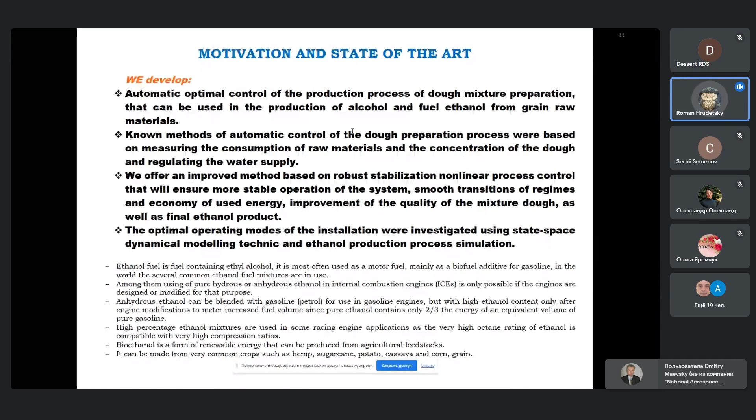The optimal operation modes of the installation were investigated using state space dynamical modeling technique and ethanol production process simulation.

From 2007 to 2008, the share of ethanol in global gasoline type fuel use increased from 3.7 to 5.4%. In Ukraine today, in the conditions of military aggression and war against Ukraine, and in view of issues of energy security and stable function of the fuel market, these initiatives are gaining special relevance.

Therefore, fuel ethanol is considered one of the most important renewable fuels due to the economic and environmental benefits of its use. It is the most promising feedstock in producing bioethanol due to its global availability and the energy gain we can obtain from biomass, used for cogeneration of heat and power.

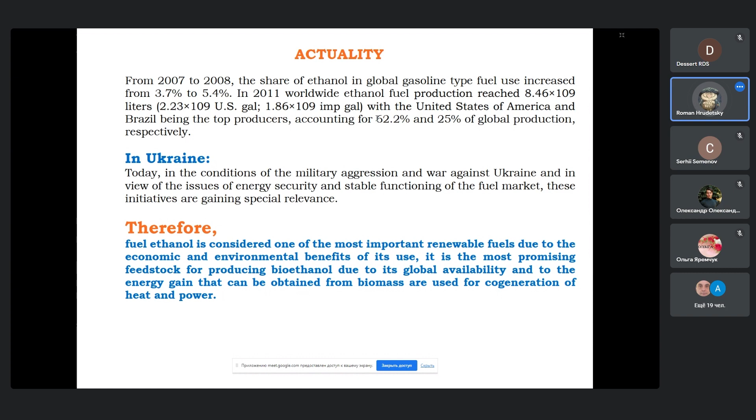We developed automatic optimal control of the production process of dough mixed preparations that can be used in production of ethanol from grain raw material.

Known methods of automatic control of dough preparation process were based on measuring consumption of raw materials and concentration of dough, and regulation of the water supply.

We offer an improved method based on robust stabilization nonlinear process control that will ensure a more stable operation of the system, smooth transition of regimes, and economy of used energy, improvement of quality of the dough, as well as the final ethanol product.

According to the proposed method, the concentration of raw material is determined and the regulation of water supply is carried out according to a non-linear law.

Several process configurations for fuel ethanol production were developed and studied using state space dynamical modeling technique and process simulation. The production device consists of a pre-boiler mixer 1,

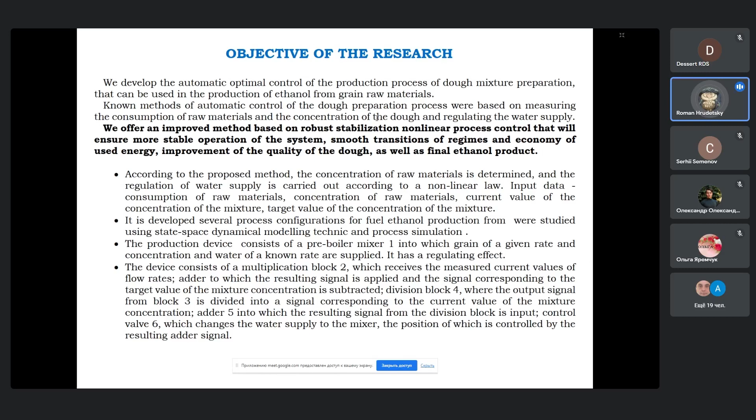into which grain of a given rate and concentration, and water of known rate, are supplied.

The device consists of multiplication block 2, which receives measured current values of flow rates, to which the resulting signal is added, and a signal corresponding to the target value of the mixture concentration is

subtracted in division block 4, where the output signal from block 3 is divided by a signal corresponding to the current value of the mixture concentration, adder 5, into which the resulting signal from the division block is input

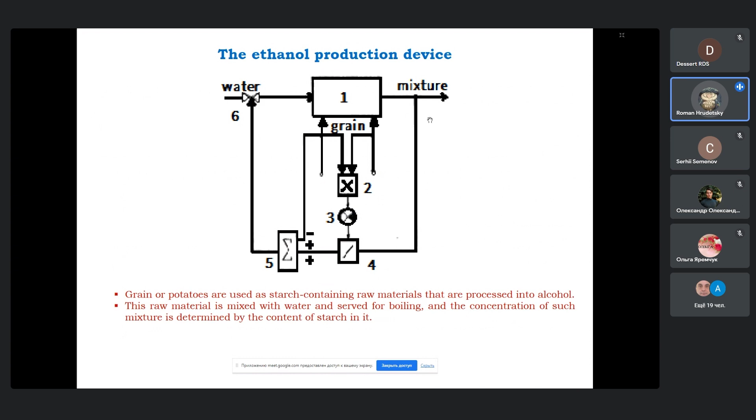to control valve 6, which changes water supply to the mixer, the position of which is controlled by the resultant adder signal.

To ensure homogeneity of the mixture, it is mixed with a propeller stirrer.

The purpose of boiling raw material is to release starch from plant cells and convert the starch into a soluble state.

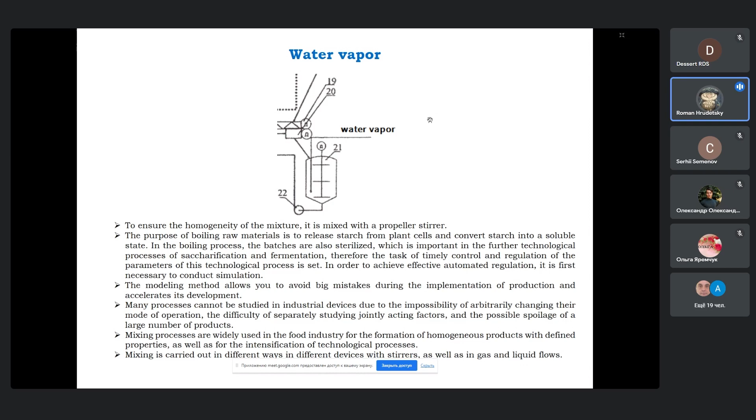The modeling method allows you to avoid big mistakes during the implementation of production and accelerate its development. Many processes cannot be tested in industrial devices due to the impossibility of arbitrarily changing their mode of operation.

Main results: we develop a robust control strategy based on the minimization of the energy efforts of the ethanol production plant, in the presence of small state perturbations of states from the position of equilibrium.

To solve this problem, we consider the state space model technique. This model includes a linearized equation and full feedback, taking into account nonlinearities.

In order to choose the correct response, a control selection center uses mechanical states to select the amount of response necessary to counter the disturbance. This center evaluates the difference between an estimated state and desired state, and chooses the appropriate

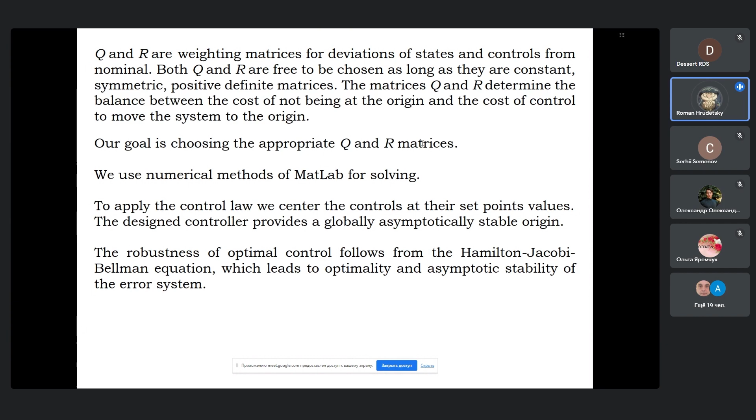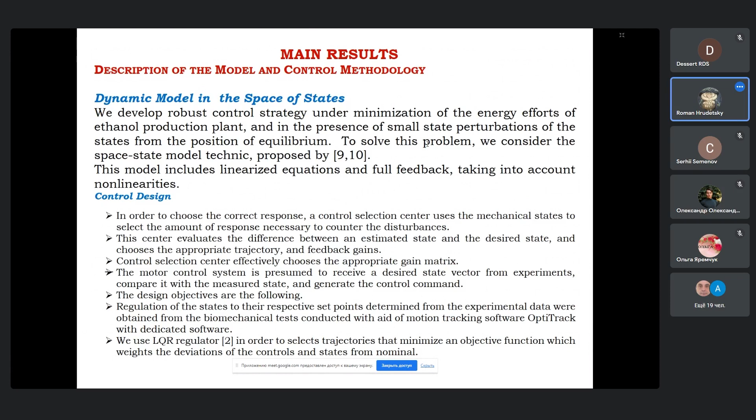Model experimental data were taken from an ethanol production installation used at most plants in Ukraine. Necessary experimental tests were conducted in real time in order to provide further analytics in MATLAB environment, and MATLAB experimental testing in order to perform an analysis and obtain real data from control law simulation as reference values.

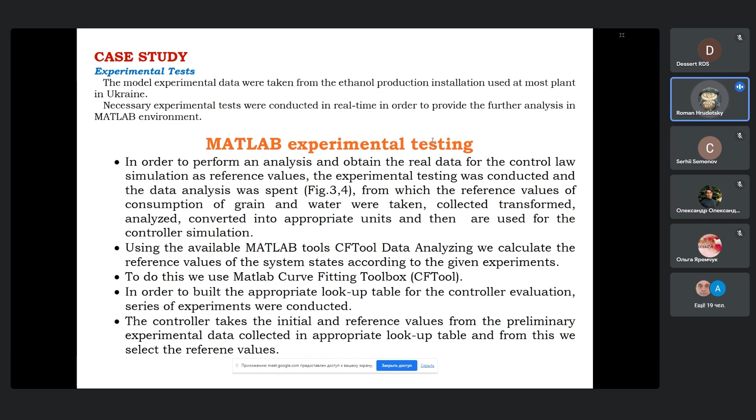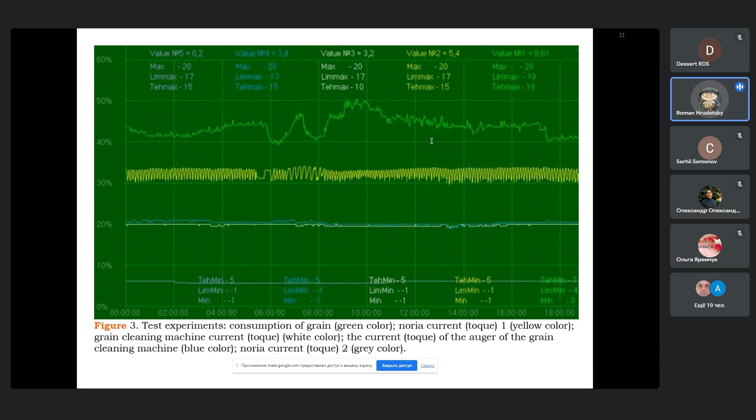The experimental testing was conducted and data analysis was spent, figure 3 and 4. You can see figure 3, from which reference values of consumption of grain and water were taken, collected, transformed, analyzed, converted into appropriate units, and then are used for controller simulation.

Using available MATLAB tools, CFTool Data Analyzing, we calculate reference values of system states according to given experiments. To do this, we use MATLAB Curve Fitting Toolbox, and in order to build an appropriate lookup table for controller evaluation, a series of experiments were conducted. The controller takes initial and reference values from preliminary experimental data collected in the appropriate lookup table, and for this we select reference values.

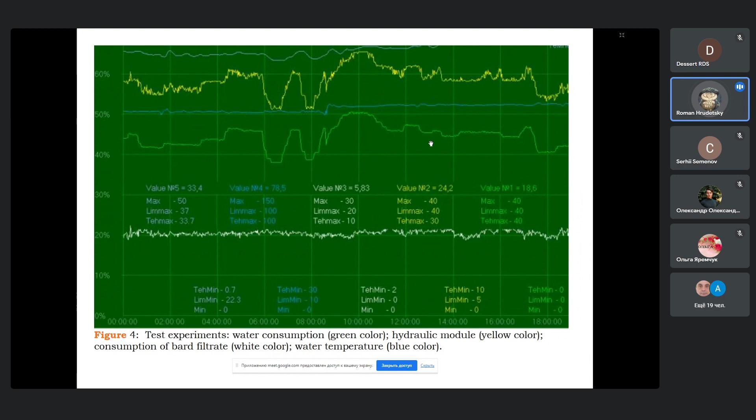We use MATLAB function ODE45 for system simulation and control system toolbox to solve the Riccati equation. With aid of function 'care' of MATLAB, we compute solution X of the Riccati equation.

Rendering the state and control to the reference values, we manipulate the weighting matrices R and Q, and they can be chosen so as to penalize excessive exertion of control inputs and the deviation of reference state variables, desired values of volume of liquid in tank and the mixture concentration respectively.

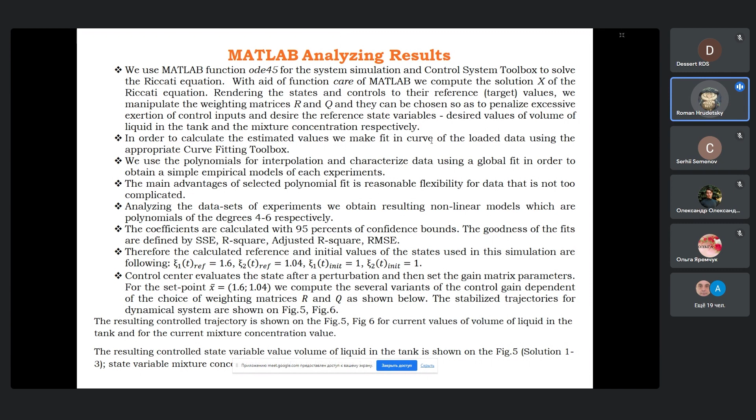The resulting controlled trajectory is shown on figure 5 and figure 6 for current values of volume of liquid in the tank and for current mixture concentration value. The resulting controlled state variable value, volume of liquid in the tank, is shown on figure 5, and the state variable mixture concentration on figure 6.

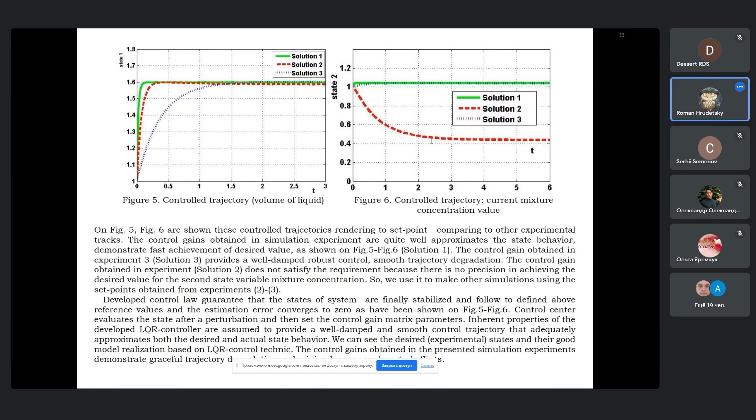Conclusions. In this paper, we have developed automatic optimal control of the production process of dough mixture preparation that can be used in the production of alcohol and fuel ethanol from grain raw materials.

The developed improved method based on robust stabilization of nonlinear process control will ensure more stable operation of the system, smooth transition of regimes, economy of energy use, and improvements of quality of the mixed dough as well as final ethanol product. We can see desired states and their good model realization based on LQR control technique.

Control gain obtained in the presented simulation experiments demonstrate a graceful trajectory, degradation, and minimal energy and control effort. Optimal operation modes of this installation were investigated using state space dynamical modeling techniques and ethanol production process simulation.

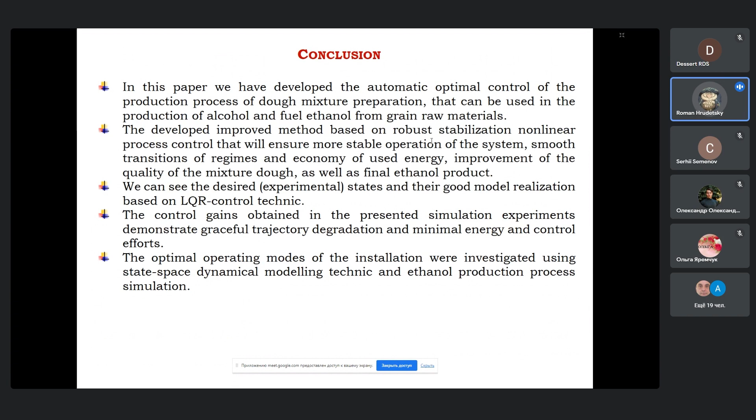Thank you. Dear colleagues, are there any questions from the conference participants? I have a question. How are the values of characteristics presented by you obtained? These characteristics which you used in mathematical models in MATLAB, how are they obtained?